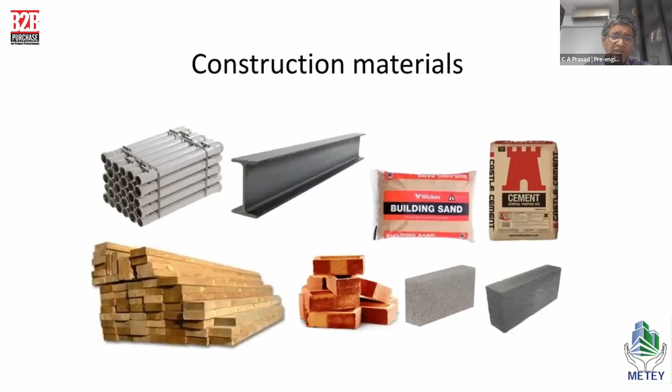So we have construction materials: steel, cement, sand, timber, PVC material, bricks, and all that. Today we are talking more about steel as a material. It's a very versatile material in construction, and steel is much used in the industrial sector of pre-engineered buildings. Whenever you say prefab, people will think of steel first, because prefab as defined in NBC 2016 can be with steel, concrete, timber or any material. However, as steel has advanced in constructing industrial structures, prefab means people think only of steel. Precast means concrete material. That is how our minds are already preoccupied.

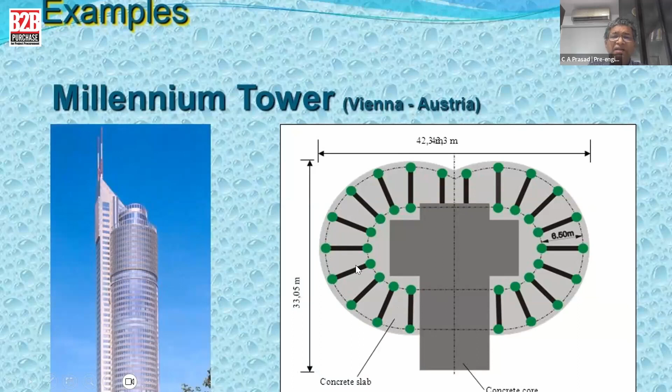There are some Western structures again in steel, such as the Millennium Tower, you can see here. This is the concrete core, and there's a concrete slab. All these are steel columns filled with concrete as composite construction. We can also see steel columns and steel beams encased with reinforcement and filled with concrete. We'll be talking more about why it has to be encased and understand what it is.

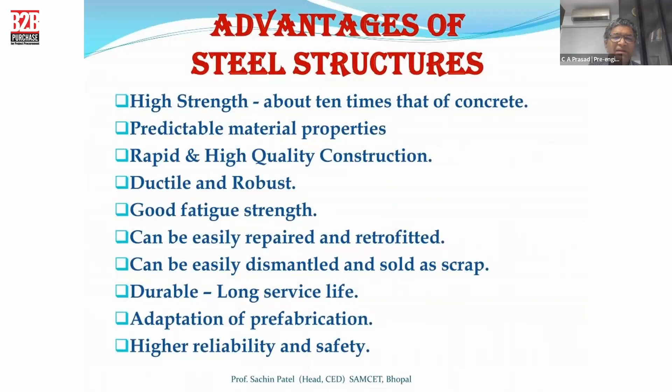Steel structures have very high strength, about 10 times that of concrete, predictable material properties, rapid and high quality construction, are ductile and robust, can be easily repaired and retrofitted, easily dismantled and sold as scrap, durable with long service life, sustainable, adaptable, with higher reliability and safety. There are also disadvantages: susceptible to corrosion, high upfront cost, requires highly skilled people to erect, higher maintenance costs, low fire resistance, susceptible to buckling and brittle fracture. Still, we use this material where it is fantastic, creating large column-free spaces such as industrial structures.

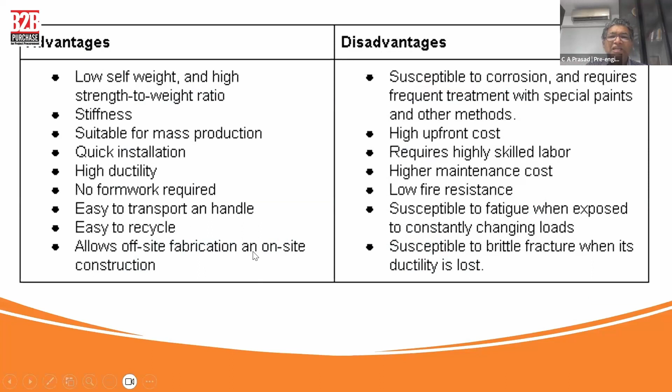Now you can also see certain space frames. They are possible with steel structures with very large column-free spaces, especially in airports and stadiums. Large column-free spaces are possible only with steel. Airports are again steel with large column-free spaces. Railway stations are steel structures. All these are possible because of a large span-to-depth and strength-to-weight ratio, and industrial buildings with large column-free spaces are all built with steel.

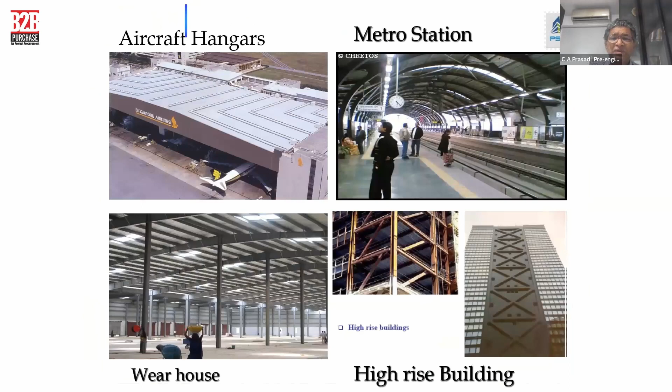So that's why I call this material a very versatile material. High-rise buildings abroad predominantly use steel. So we go into pre-engineered buildings, okay, and for industrial structures, we just take it up more, right.

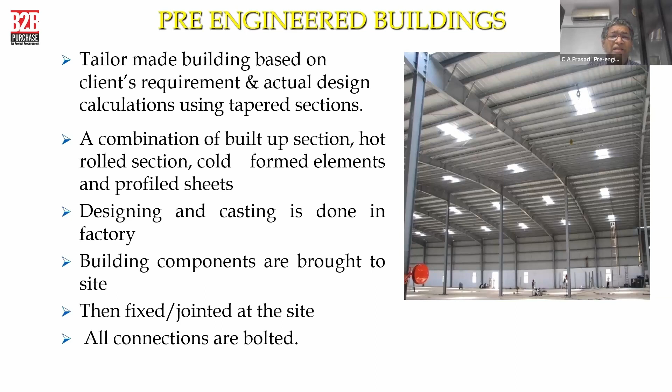So this is again the tailor-made building based on the client's requirement. Okay, and in between we can have some columns, or we need not have columns, depending upon the span. Design and casting is done in the factory, and they come onto the site and are then fixed and jointed at the site. All connections are predominantly bolted. We don't predominantly do any welding at the site, unless rarely it is required.

Now, what is a brief history? Steel is a very expensive item, as we all know. The concept of PEB, pre-engineered building, originated from here. Steel is very expensive. A section should be provided as per the bending moment diagram, right? If you are providing a section as per the bending moment diagram, then it saves steel.

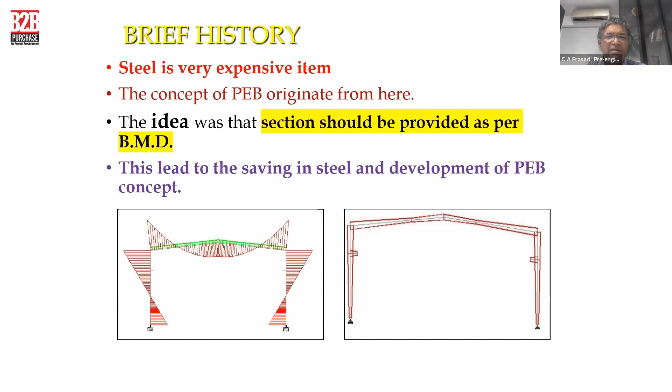The PEB concept is coming into that. So it is strictly following the bending moment diagram. Wherever the bending moment is high, at that portion the section depth is more. And in other locations, the section depth is lesser. So in the pre-engineered element, these sections are tailored to meet that particular demand and fabricated according to that. So that's how we have done that.

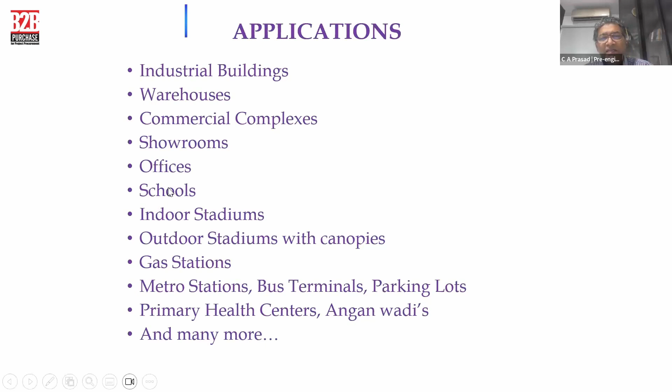And the applications: industrial buildings, warehouses, commercial complexes, showrooms, offices, schools, indoor stadiums, outdoor stadiums with canopies, gas stations, metro stations, bus terminals, parking lots, primary health centers, and so many things. All these things are possible because it is faster construction, and it is prefabricated at the factory, comes and is assembled at the site. So we have industrial buildings, indoor stadiums, parking lots, like this various structures can be seen.

Advantages: aesthetic appeal, faster completion, economical, seismic resistance is good, ease of expansion. If the structure is built, yes, we can expand it by connecting to the structure again. Maintenance free, large clear spans, controlled quality, and hassle free.

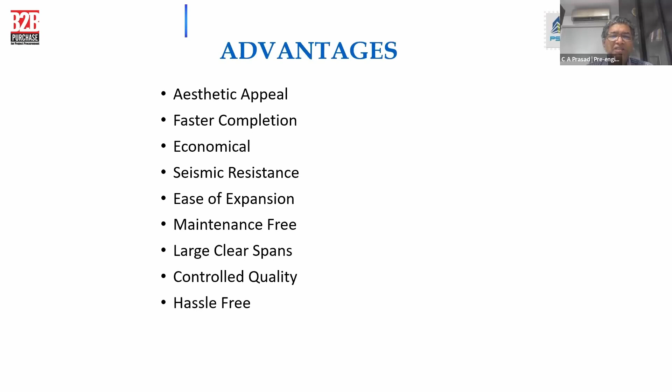Now, pre-engineered steel buildings versus conventional steel buildings. In pre-engineered buildings, self-weight is less, about 30% lighter; self-weight is more in conventional buildings. The primary member is a tapered section, whereas primary members in conventional steel are hot-rolled sections, which are readily manufactured and readily available. There we are wasting a lot of material, whereas in the pre-engineered building, we are saving material.

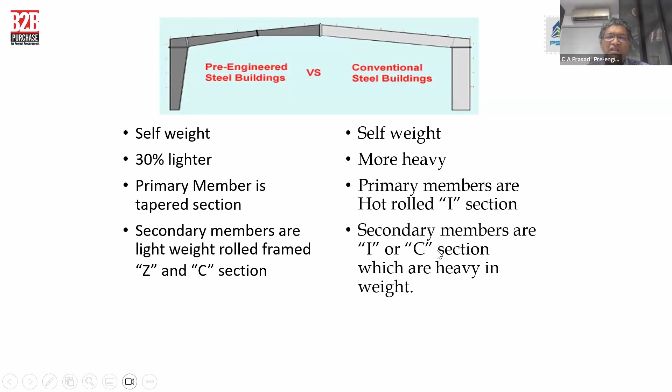Secondary members are lightweight roll-formed Z and C sections, called light gauge sections. The Z section as a purlin is a wonderful innovation in the steel sector, where the purlins span about 6 to 8 meters, and we connect them with sag rods such that they prevent lateral buckling while carrying the gravity load. In a conventional steel building, you go with a channel section or sometimes an I section, which is heavy. So that's where pre-engineered buildings take an advantage.

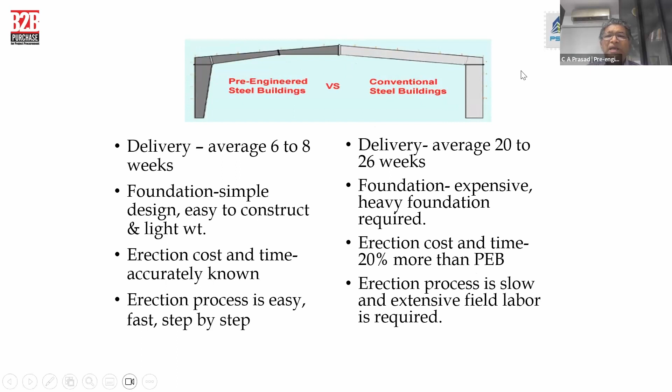Delivery is 6 to 8 weeks, whereas in the conventional steel building, buying the hot-rolled steel sections will take time. The foundation is a simple design, easy to construct and lightweight, whereas conventional needs an expensive, heavy foundation because of the weight of the material. Erection cost and time are accurately known, and the erection process is easy in a PEB, whereas being heavy material, conventional takes a longer time.

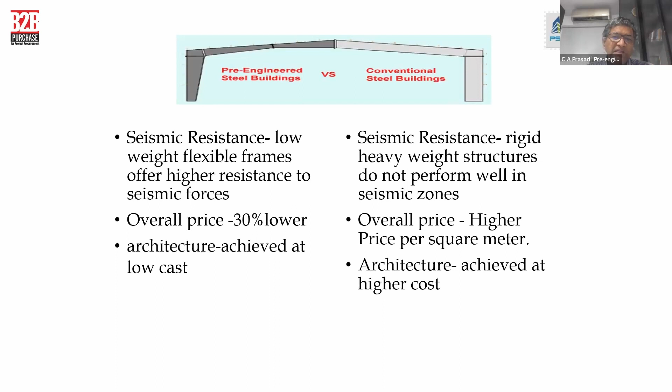Seismic resistance is high because of low weight and flexible frames; the lighter the weight, the lesser the seismic load attraction, whereas it is more in conventional construction. So overall pricing in PEB is lower. Architecture achieved at low cost is something we have to look at.

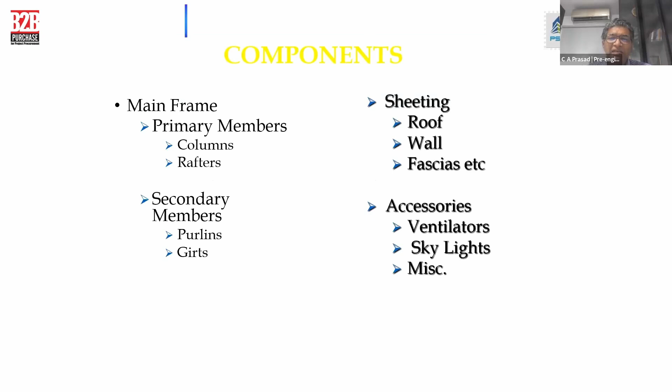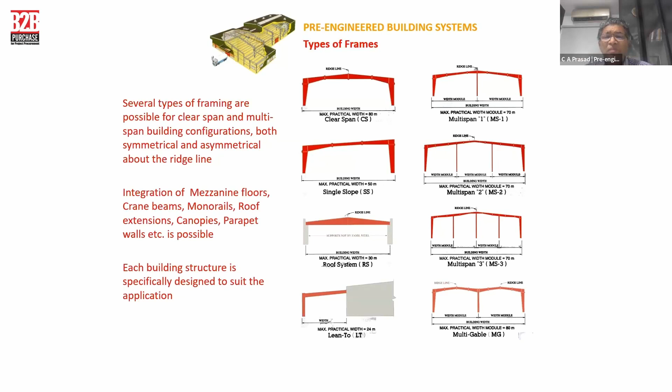Main primary members are columns and rafters. Secondary members are purlins and girts, sheeting, roof, wall, fascias, etc. Accessories are ventilators, skylights, and miscellaneous. We have various frame types: clear span, pitched roof, multi-spans like 2-span, 3-span, 4-span, and then single slope like this.

And then we have the roof and wall cladding system with insulated roofing. If you want insulated roofing, polystyrene or rock wool is provided beneath the galvanized roof sheeting and attached to it.

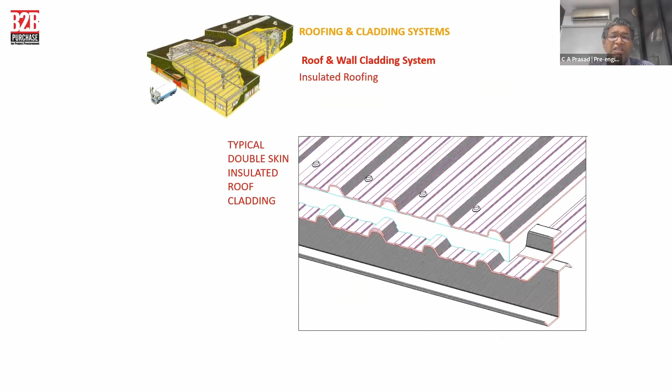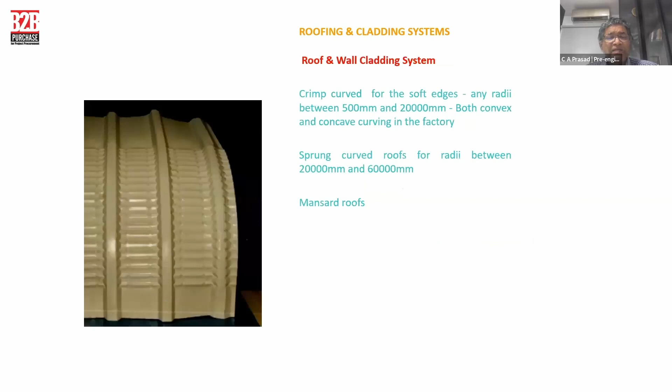Sometimes double skin is provided at the bottom also, or an aluminum foil comes as a sheeting at the bottom of the insulation. So the advantages: we have this roof and cladding system with a ventilation system also, and the steel material can be bent and curved to any shape, and various structures are there in the PEB. That's how these elements can be made.

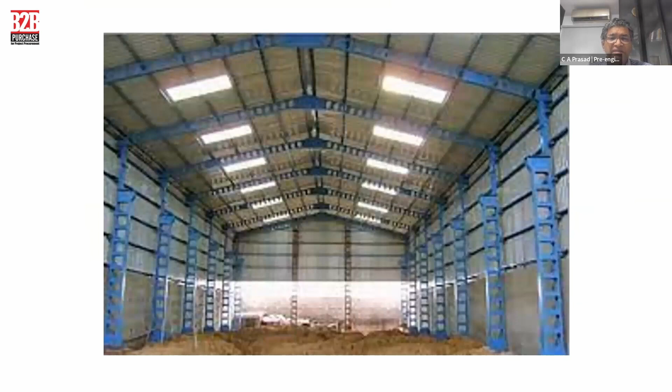You can see that even a lighting system can come into this, with polycarbonate sheets provided on the rooftop, whereby they automatically throw the light inside, right? Then optimization in the PEB design, which is one of our topics. Here, the optimization that we can do is bay spacing, which depends on the wind speed. Normally we provide 6 meters, and the maximum is 8 meters.

Okay, and the pinned base plate at the footing of the stanchion is economical. So we try to provide, to the extent possible, the pinned footing, and that will be taken care of in the design. And the roof slope of 1 in 10 is economical, and rod bracing is effective and economical. Rod bracing, because the ends will usually be providing the bracing points, as well as in the middle also. So these bracings are provided against the lateral forces.

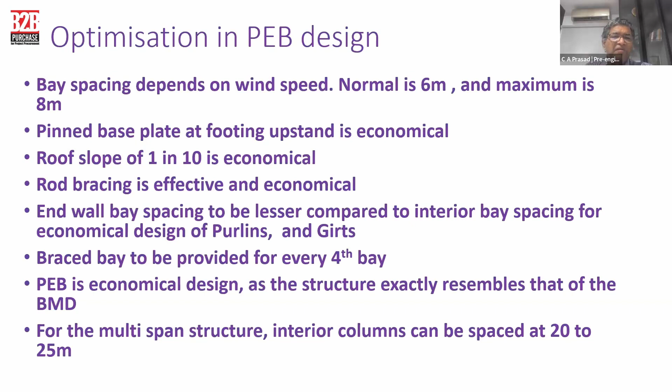These are provided for every fourth bay. That is an optimization that we can do, and it is effective enough to be structurally stable. This is an economical design, and the structure exactly resembles the BMD. For multiple spans, you can provide the columns at every 20 to 25 meters. So that is about PEB design. Now we'll move on to composite construction.

In composite construction, we have the composite girder, an I-beam with an in-situ slab or a precast slab. In composite columns, I can keep a steel column inside and then wrap it up with an RCC column, okay? Or else I can keep my column and then, within the flanges, pour concrete by providing the steel reinforcement. That is one way. Or I can take a square tube, fill it up with reinforcement and pour concrete, okay?

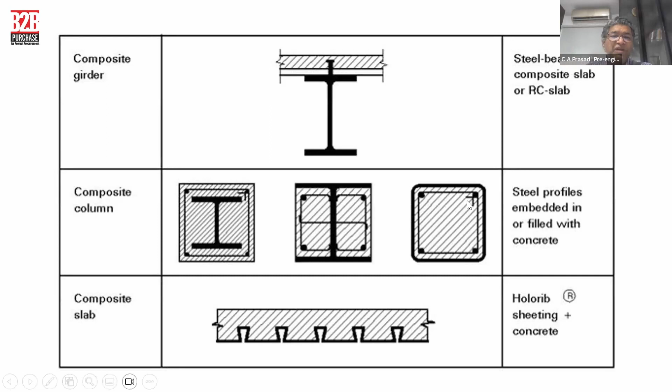Thereby, I can achieve the strength parameters also, either 50% with concrete and 50% with steel, or 30% concrete and 70% steel, whatever way we want, we can do that. Similarly, composite slabs can also be taken care of. Similarly, beams can also be encased in concrete, okay? Or box sections can also be filled with concrete, okay?

And what is the real purpose of providing this? The basic thing is the steel will be protected from corrosion, and it also gives fire resistance, right? So that is the purpose for which we do steel encasement, which is required in the case of multi-storied buildings where the slabs will come, right? However, it will have the shear connectors, which will give the composite action between the concrete and the steel beam, such that they act together, right?

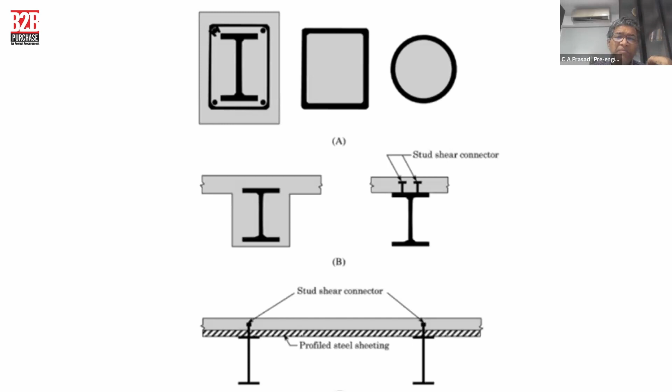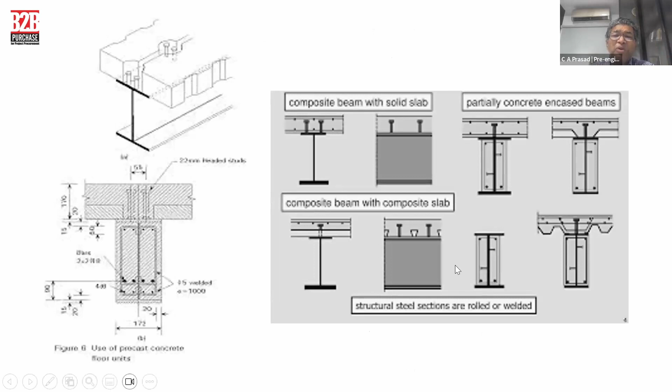And we can also see a steel beam with the shear studs. These are various pictures of that. Steel beam with the slabs, and how the connectivity can be done, and how concrete can be placed. And this is a very famous one, the composite slab with a deck slab, profiled steel decking, which will be placed on top of the steel beam.

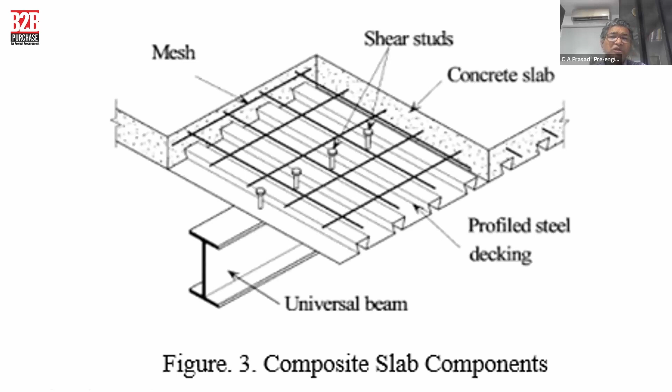And the shear studs are punched through and welded onto the top flange of the beam such that it gives a composite action. And on top of that, they provide about 80 to 100 mm thick concrete with reinforcement, so a composite action will be developed. And it also gives diaphragm action. This is the composite beam with the shear connectors, and it can be with the decking sheet or without the decking sheet. You can put shuttering and pour concrete.

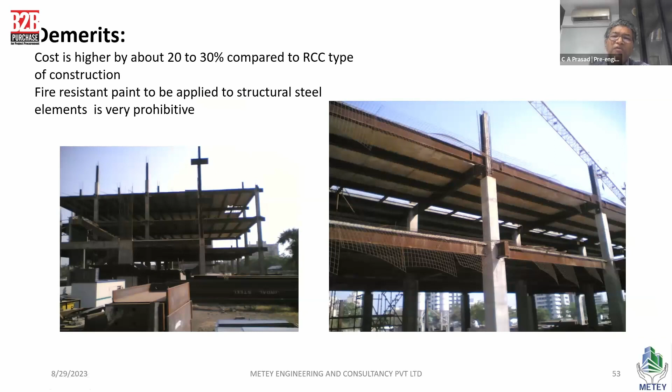Okay, so basically, you can see that the steel column can be encased in concrete, which will give the corrosion resistance and the fire resistance, which is much needed for the steel columns as well. And then you can provide a shuttering and pour concrete, or you can provide a deck slab as I showed you. The basic thing with this is that if you don't provide that, then you have to provide the fire resisting steel. Okay, two types of systems of that.

One is a non-reactive insulation coating, and the other is a reactive coating. In the case of a non-reactive insulation coating, vermiculite and perlite are natural insulation materials mixed with cement or gypsum for bonding capability with the steel surface. And when you apply it on top of the steel beam, that will take a thickness of about 40 mm. And that looks a bit ugly when you apply it on top of that.

Then naturally you have to provide some sort of a false ceiling, but the fire resistance is taken care of by providing the vermiculite system on top of the steel beams, which will give the fire resistance. Reactive coating is such that when we're providing the intumescent coating, sometimes the cost of the intumescent coating is equivalent to the parent material cost.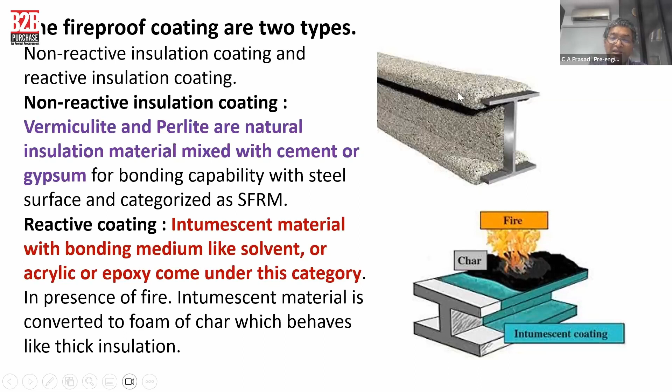Okay, fine, it gives you about 2 to 4 hours fire resistance, but after applying this on top of the steel beam, it hardly takes about 1 or 2 mm, depending upon the 2 or 4 hours fire resistance that is our requirement. But after providing this, it looks so nice, being 1 to 2 mm instead of the 40 mm of vermiculite that you are applying on the top. Then there is no need of a false ceiling for this material.

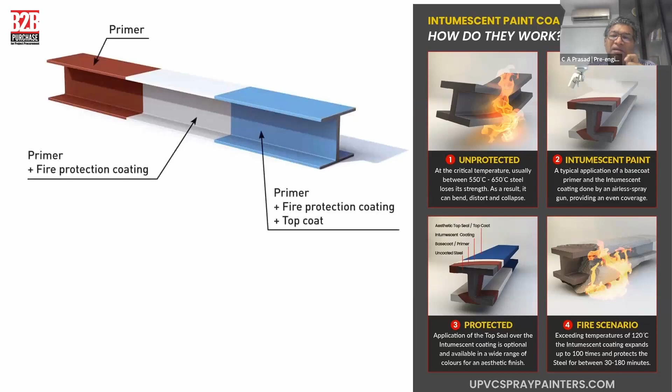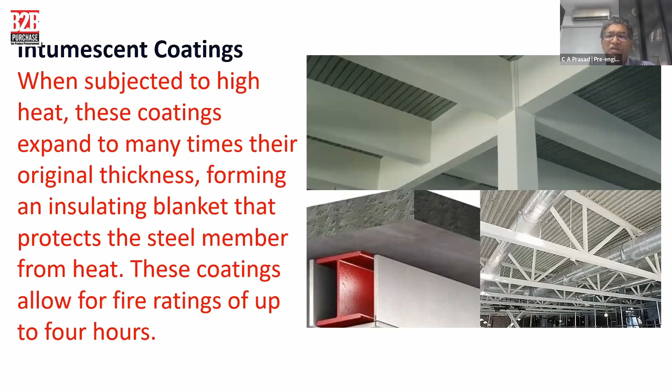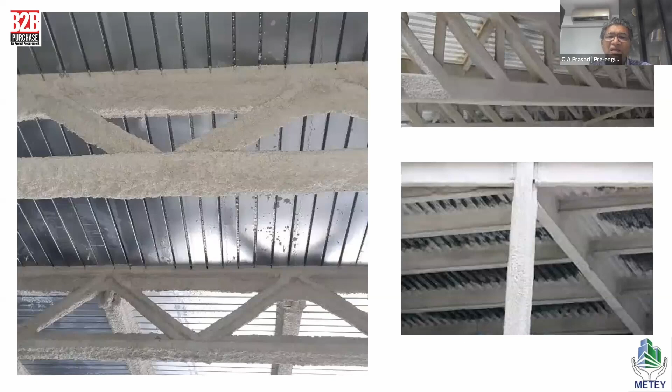Of course, you can also use fire resistance boards, which again give 2 to 4 hours fire resistance. These boards usually come from New Zealand, manufactured there. They're also quite expensive, like intumescent paint. Vermiculite is the only cost-effective material, but then you have to provide the false ceiling. So this is how vermiculite looks when you apply it. Then we have to provide some sort of a false ceiling.

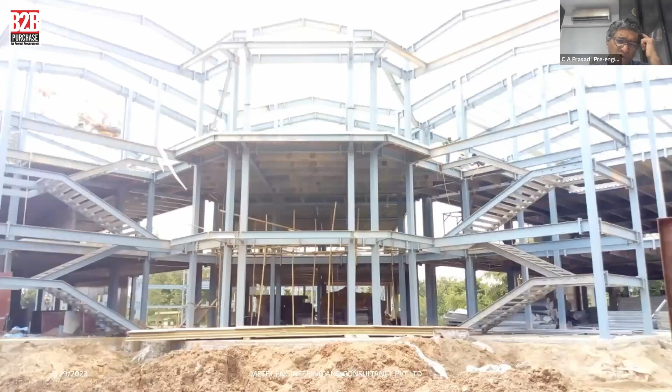It will be applied on top, which will take about 40 mm thickness. Of course, we also have the materials, and with this type of system we have built a 3-story building in about 6 months' time for a nursing school in the Numaligarh area, northeast region.

But here we have used outside the cladding panels, which will have rock wool inside. It has a GA sheet, galvalume sheet, both inside and outside, and it has rock wool insulation, which will give the fire resistance required for that. It is a drywall panel again, drywall panel.

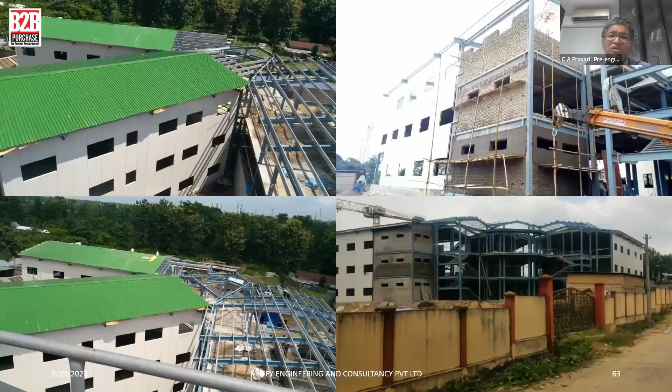But of course, in the area of the toilets, we did provide brick masonry such that it will take care of the tiles so they can be fixed on that. For the rest of the areas, it is a rock wool insulated panel, which will take care of the fire also. Rock wool has 2 hours fire resistance. Corresponding to that, we have provided the thickness.

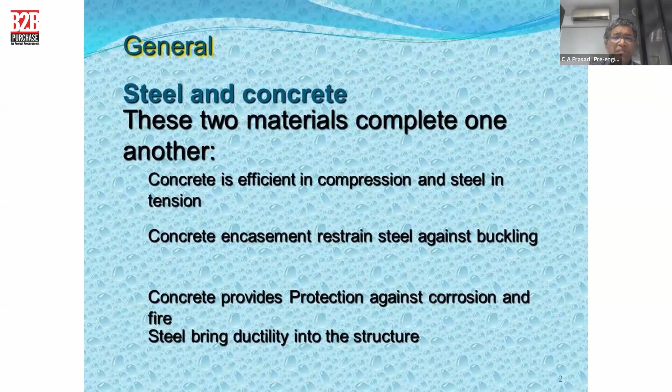So, casting a slab without shuttering, this is what I was talking about, the slab. There is no need of shuttering. The deck acts as permanent formwork, and it combines with concrete and acts as one element. So you can also say that it refers to any composite of more than one material. Composite construction means these are rigidly connected such that no relative movement can occur.

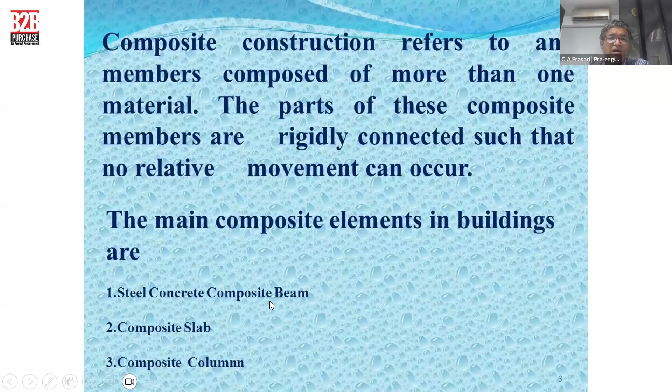Steel concrete composite beam, composite slab, composite column. Functionality: fire protection by using principles of reinforced concrete, in which concrete protects the steel. And now what happens here is the carrying capacity and stiffness of the beam increase by factors of up to 2 and 3.5 respectively when we go for composite construction. It is normally designed to be unpropped during construction, right? And that's the beauty of this.

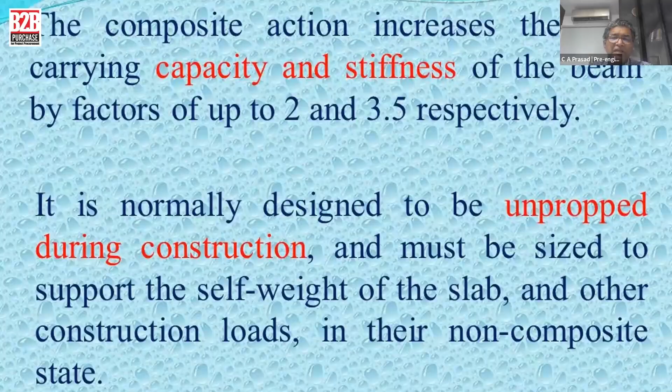So composite construction: concrete filled tube. Nowadays much of this construction is also taking place. You can use a steel tube and then fill it with concrete. And if you want to enhance its strength, you can also provide steel rods into that, as well as the links, or you can provide some more steel, because sometimes the architects will say, I want a slimmer column. Then I provide one more steel element inside and pour concrete.

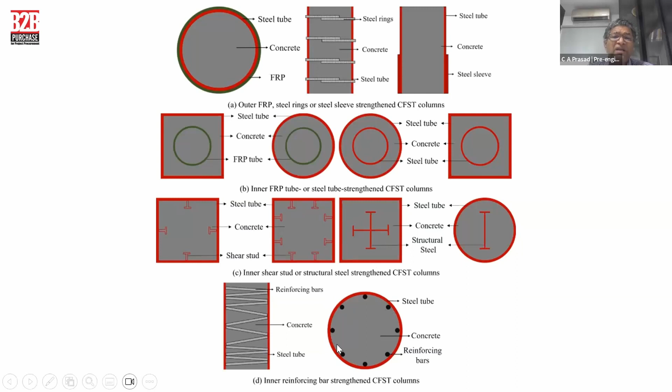I have one outside element, and I provide one more steel element inside, such that it takes care of my lateral forces as well as the gravity loads which will come into that. But here is an element where we provided the shear studs inside and then simply filled it with concrete. Here we have provided steel rods inside filled with concrete. There are various ways in which you can provide concrete filled tubes.

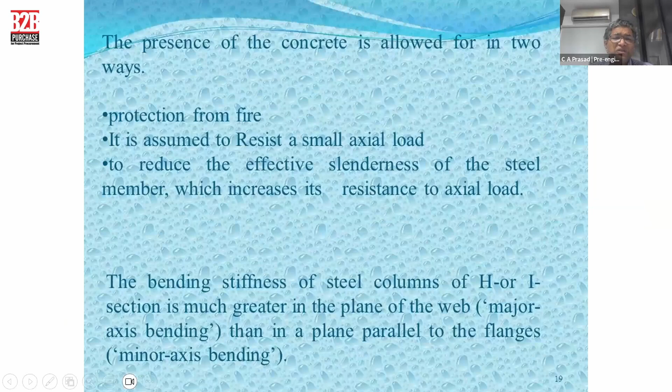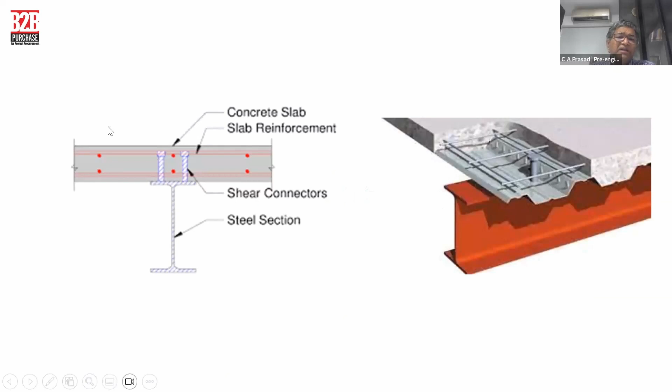This is how you can also see that the steel elements are provided, and then we provide shuttering and pour concrete into that particular element. And so it is basically protection from fire. So these are the composite beams, which we have already seen some of the details of, with a deck sheet and on top of that, the concrete. These are the shear studs, which will go into the concrete to give the composite action.

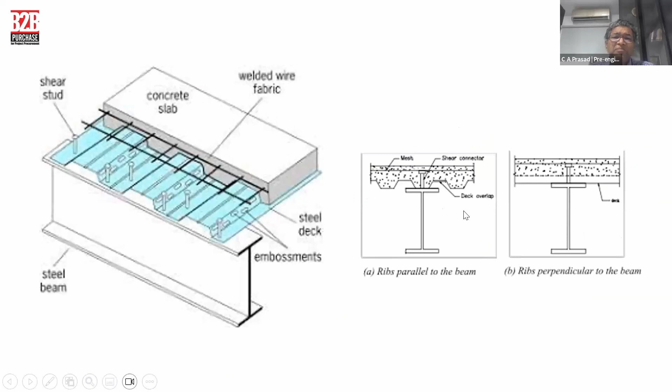Some of those pictures: steel beams, composite slabs, the deck slab, and steel beam. These are the composite slabs again. And we do not need formwork. Lightweight concrete is used, resulting in reduced dead weight. Decking distributes shrinkage strain, which prevents serious cracking. It also stabilizes the beam against lateral buckling until the concrete hardens.

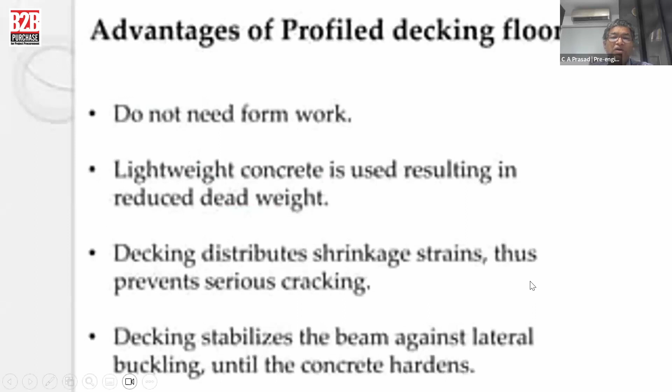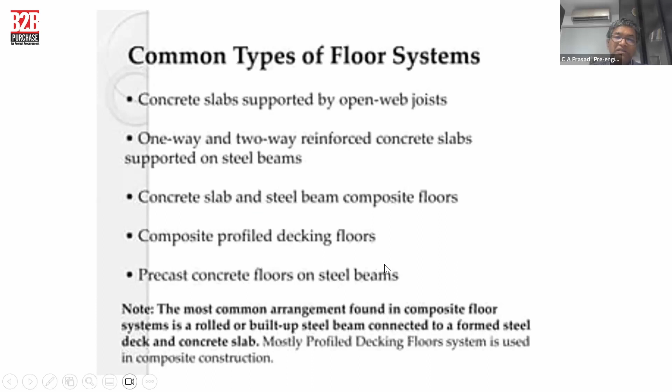Common types of floor systems are concrete slabs supported by open web joists. One-way and two-way reinforced concrete slabs supported on steel beams are possible. Concrete slab and steel beam composite floors, composite profile decking floors, precast concrete floors on steel beams. I will show you the details of this when we come to precast construction.

Now, precast construction. This is on par with prefab construction; it is also called prefab construction. Prefab means we have multiple elements which are connected and joined together to make a rigid construction. Right? So we will slowly go through precast, and then how I'm taking the steel into my concrete will be seen. Right?

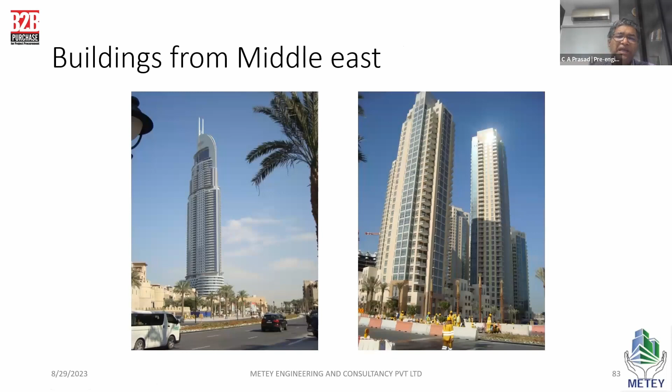Buildings from Middle East the precast elements are precast with concrete. Multiple, all buildings are going with precast construction.

In precast, one of the beauties is that we are creating hollow core slabs, solid precast slabs, prestressed precast slabs, double tee and single tee slabs. Hollow core slab can span up to 15 meters, single tee slab can go up to 18 to 20 meters, and double tee slabs can go up to about 25 meters, even beyond 30 meters.

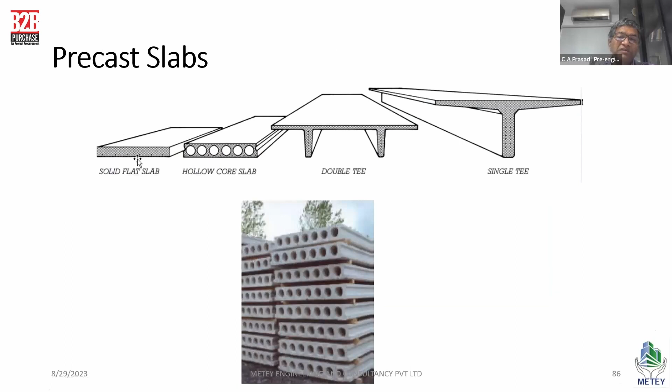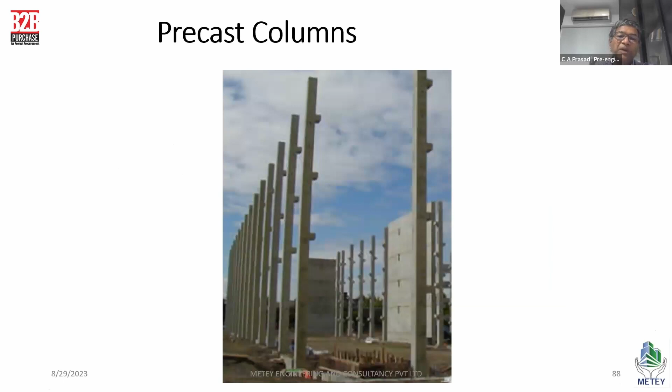Beams can also be precast, and the beauty is that in precast, 3-story and 5-story precast columns are coming out and then joined together, and the beams will come and join at each floor. Thus, they are saving time.

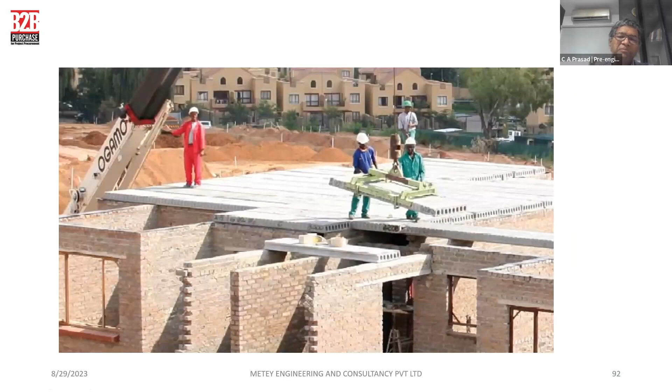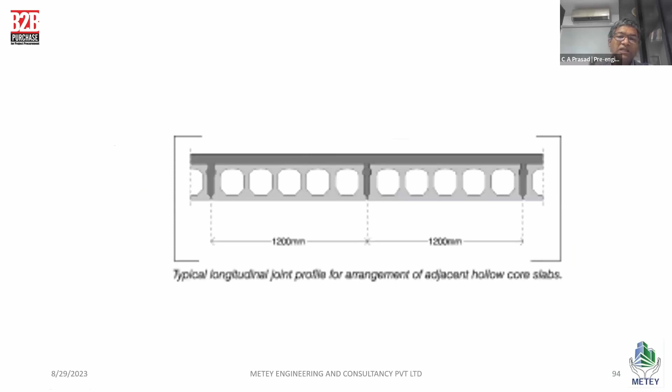Precast hollow core slab is like this. With the help of clamps, they will lift and place it on the seats. All these rod bars are pretensioned wires used with this particular precast hollow core slab. On top of joining them, we provide about 60 to 70 mm structural topping, such that it creates diaphragm action. This is how the industry looks like with precast slab.

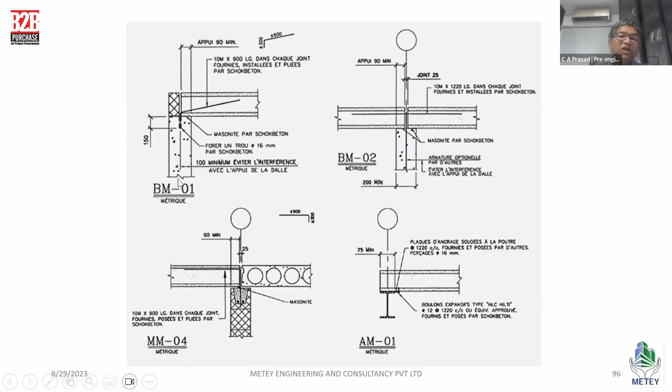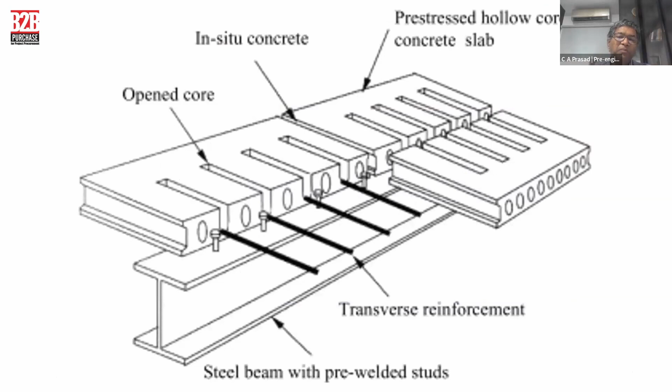My philosophy of showing precast is that steel beams can be used as a floor beam onto the precast walls or precast columns, and then hollow core slab can be provided, thus it becomes a composite slab.

So double tee slabs, as I'm telling you, can span across. There is a 10-meter column free spacing, but a double tee slab can span across 30 meters. When it is used in car parkings or in shopping malls, it gives a large column-free space, which is a beauty for the shopping owner, who can place his material wherever he wants.

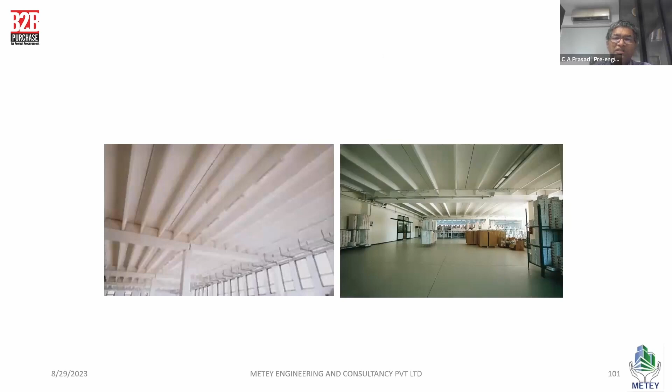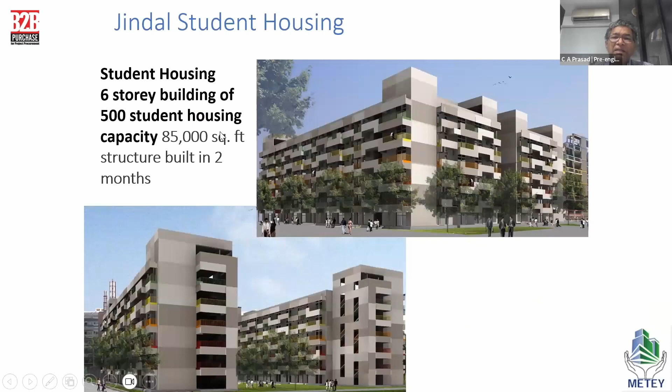This is how precast buildings are coming up in India. Number of buildings are coming up because of that - a school can be built in 28 days, and they built it. Some of these precast buildings are also such that you need not paint outside, you leave it gray and open like that.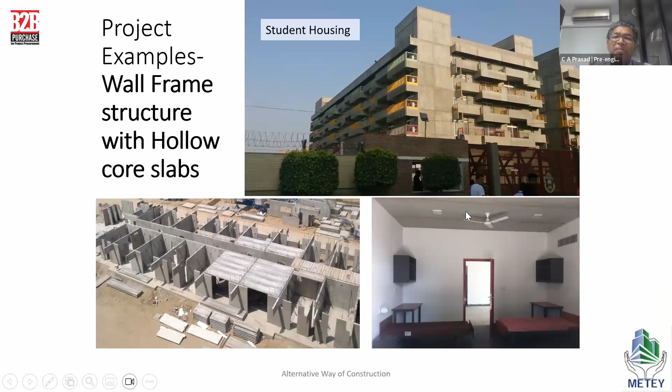One architect has done it in such a way that only the railing is made with color, but outside it is gray. Inside, the walls only get painted for ambience purpose. Again, for the precast slab, we have done the painting. Yes, 16-story precast buildings are built here in Ghaziabad, NCR region.

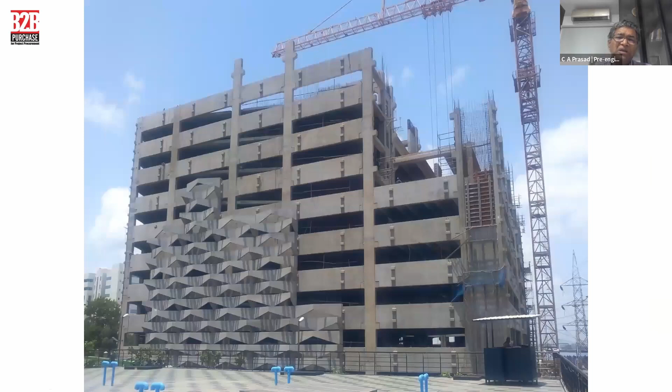Some of the beautiful things can be done in precast also. One precast India infrastructure company has done a structure with concave and convex facade elements, which will bring light into the structure, so the building appears bent.

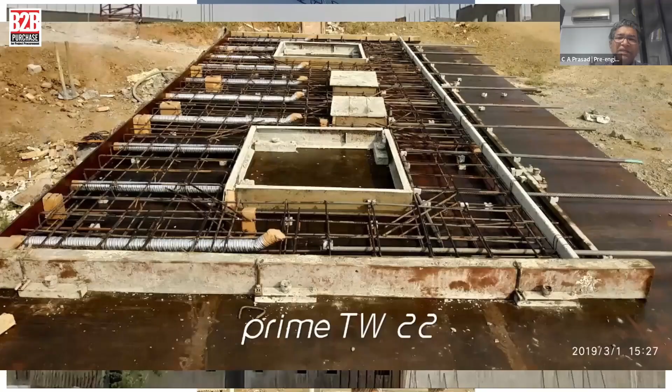Some of the precast structures, right, and yes, there are 2-story, 3-story buildings into that as well.

The point that I'm trying to bring is precast is also coming into industry, whereby they are making the precast columns also, however, they are using the rafters also with precast beams. But then for the roof, still we are going with Z purlins and roofing sheets, such that precast and composite construction is happening into this.

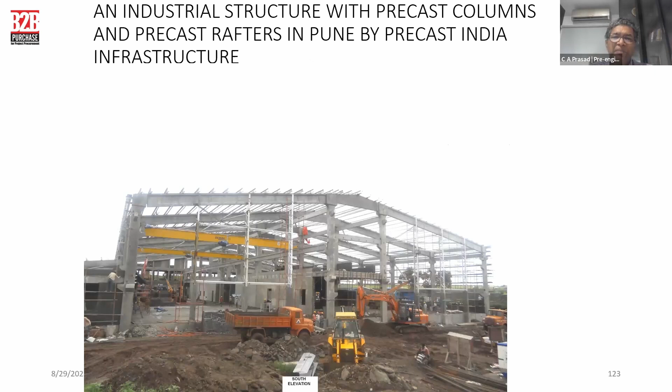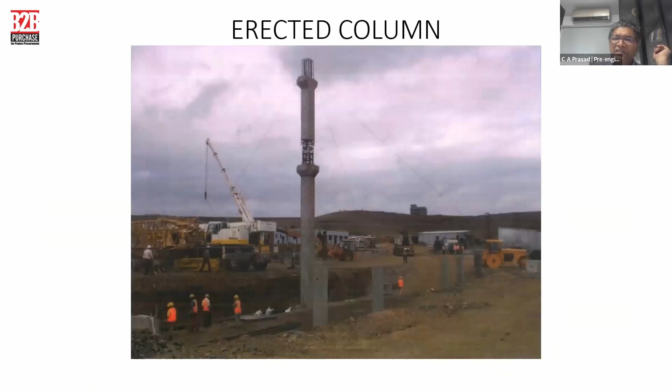Prasad, once again, the precast elements are coming up. This is how the buildings are built, right? So this is how precast is coming up, and we are mixing both the roofing element as well as precast element into that particular thing.

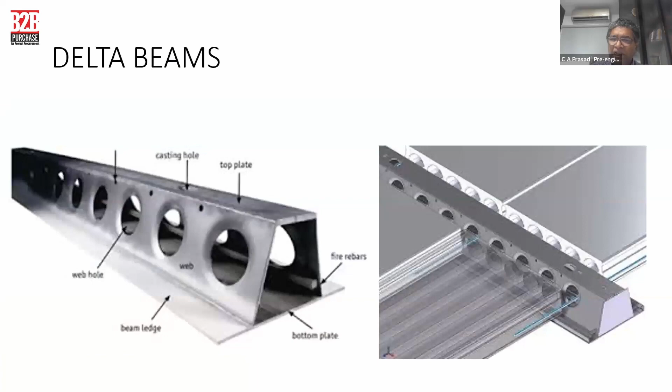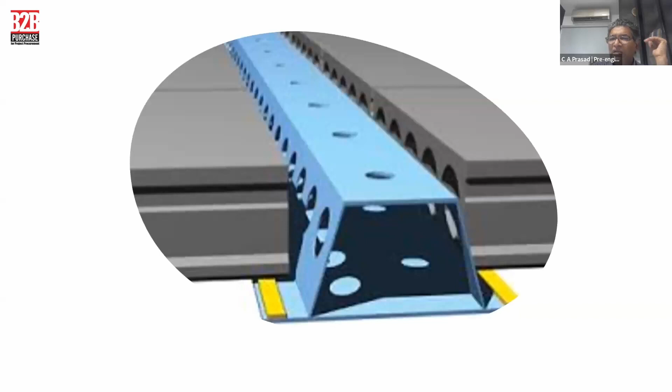Then the delta beams, which have precast slabs coming up into that - it's not a normal beam, the concrete will flow into that, there is a special beam made for that particular purpose. So with that, I will close my presentation.